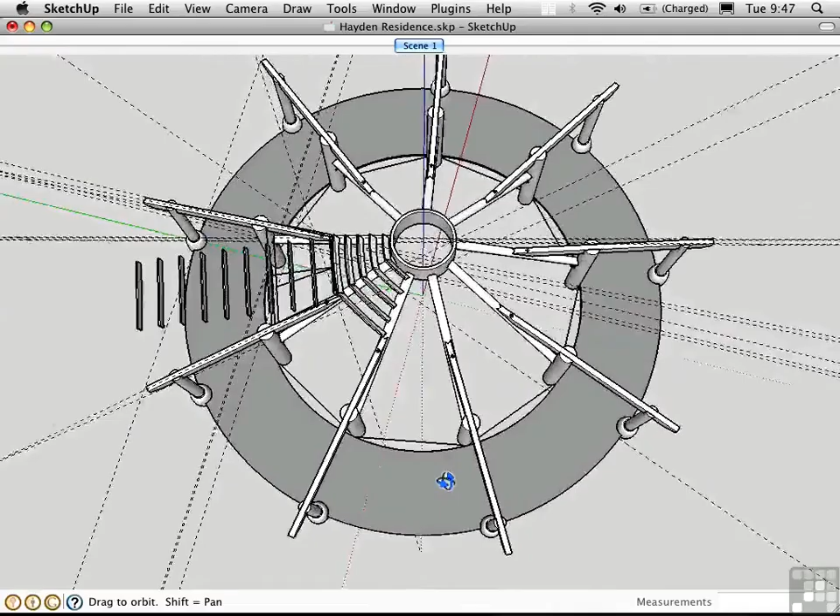Being able to change the drawing axes becomes critically important when working with more complex geometry. Here I'm working with a 9-sided structure, so I have some unusual angles to deal with. The drawing axes are represented by the red, green, and blue lines forming a tripod.

I've centered this within the design, which is good practice whenever you're dealing with a circular or regular polygonal structure—center it around the axes. Also, if you're creating a component, it's good practice to locate the drawing axes in a meaningful location, because the drawing axes within the component become that component's insertion point. We'll cover components in greater detail later on.

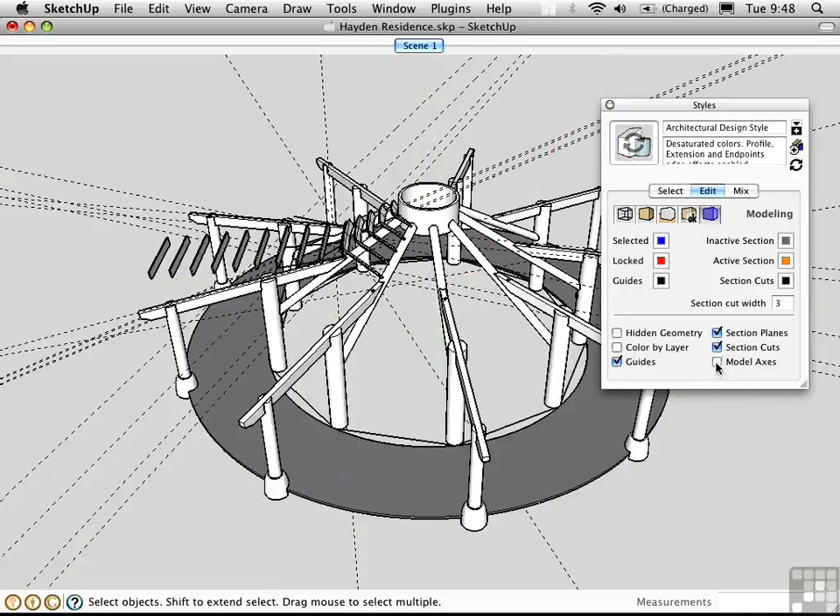You can toggle the display of the drawing axes in the Styles window. Go to the current style, choose Edit, and click the last button to go to the modeling settings. You can toggle the model axes with this checkbox—it merely displays or hides the axes. Sometimes when doing a presentation on screen, it looks cleaner to toggle the axes off. If you're using my shortcuts, you can toggle this by pressing Ctrl-A.

There are a couple of different ways to change the axes. First we'll use numbers, then I'll show you how to do it graphically. Let's say we know a specific angle we'd like to rotate the axes to—this allows us to draw geometry on an angle. Right now, if I draw a rectangle, it would align with the axes. Let's change the axes and draw another rectangle to see the difference.

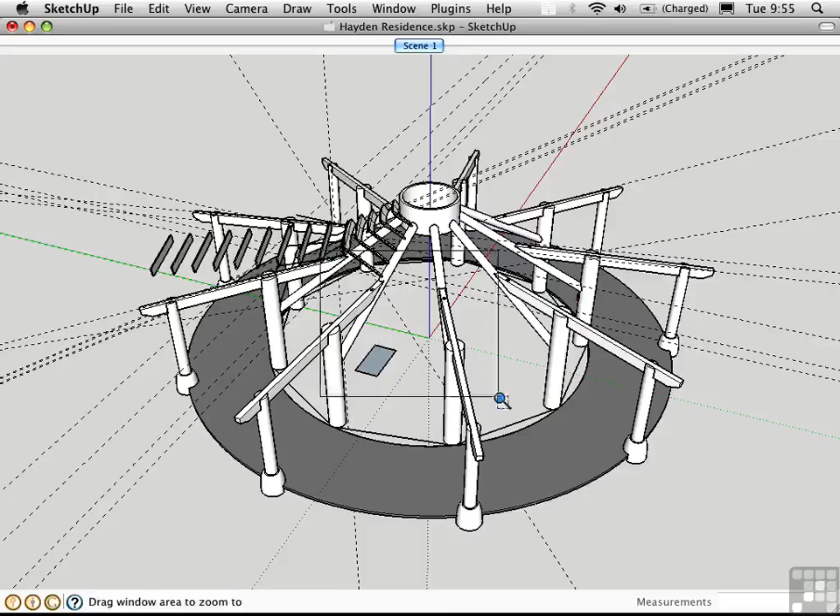I'll zoom in here and right-click on one of the axis lines. It doesn't matter which line you choose, but it's important not to click on top of something else—I'd get a different menu right-clicking here compared with right-clicking there. I'll choose Move from the context menu, which gives us a chance to set an offset distance for the axis or a rotational angle. In this case, let's rotate the drawing axes 40 degrees around the blue axis.

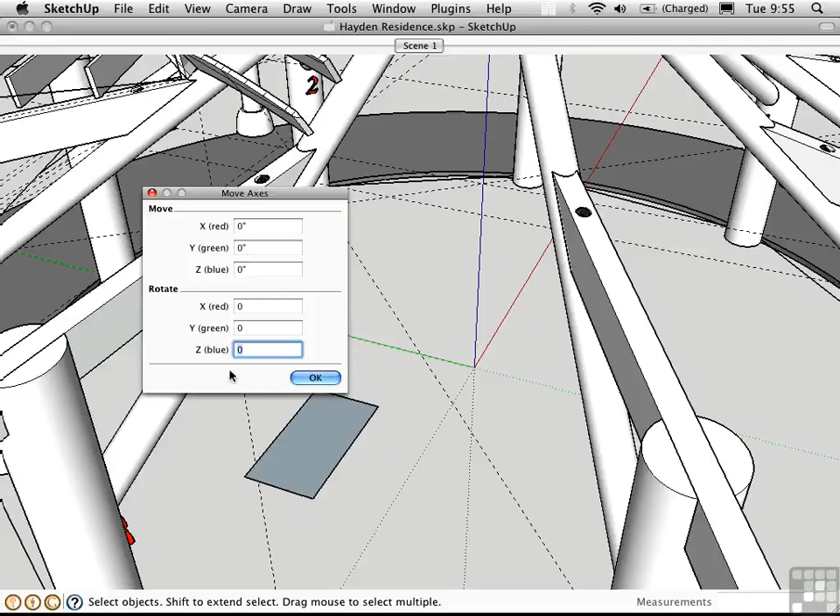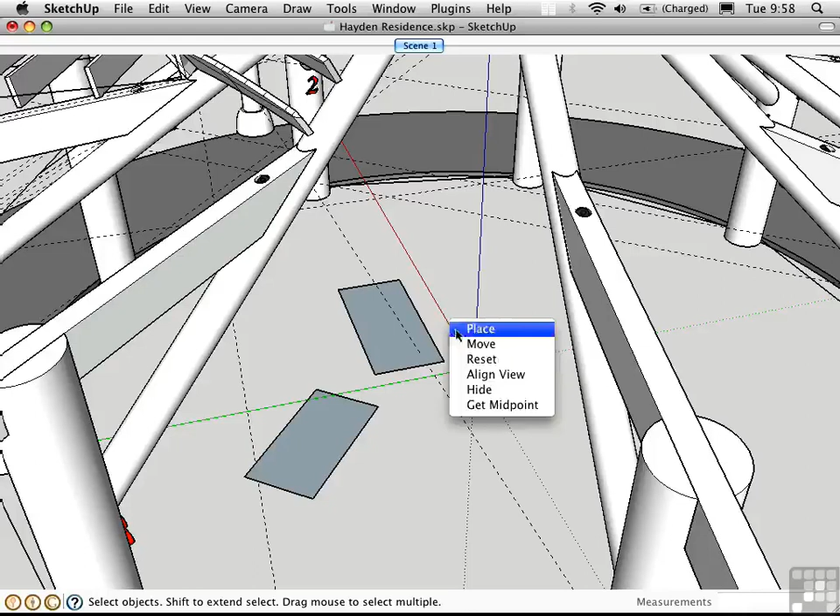Now I'll draw another rectangle, and you'll see that it aligns with the new axes. Let's say we want to go back to the original orientation of the drawing axes, but don't want to be bothered typing in numbers again. We can just right-click on a drawing axis and choose Reset from the context menu, and we'll go back to the original drawing axis. In AutoCAD, this would be called the world coordinate system.

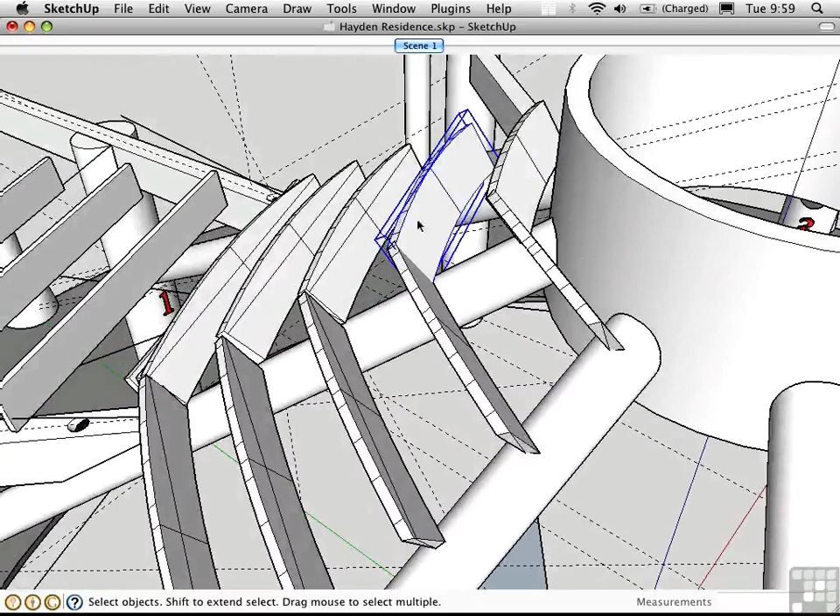Now let's take a look at the graphical approach to changing your drawing axes. I'll zoom in here on these purlins and rafters. Let's say I want to create another purlin down a bit, and I don't want to try to figure out this angle—I just want to do it graphically. I can do that fairly easily by changing the drawing axes with the Axes tool.

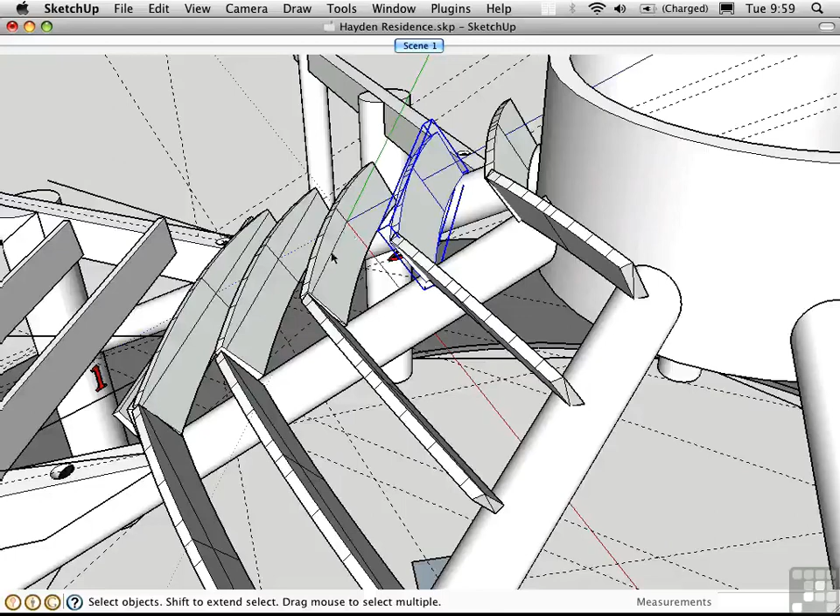If you're using my shortcuts, that's Option A to activate it. There's a drawing axis connected to the cursor—click a point to determine the new origin, then click a second point to determine the direction of the red axis, and a third point to determine the direction of the green axis. Now the tripod is located here, so I can easily slide objects along its blue axis.

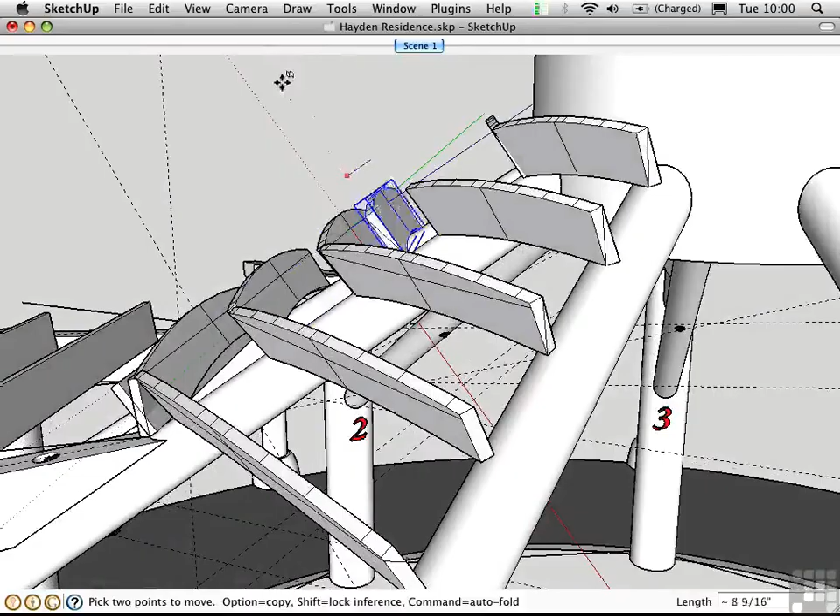I'll press the up arrow to lock the blue inference, and you can see that I can easily move this purlin up and down the rafters. Let me rotate the point of view to show you what's happening there. This is really the key to working with more complex geometry.

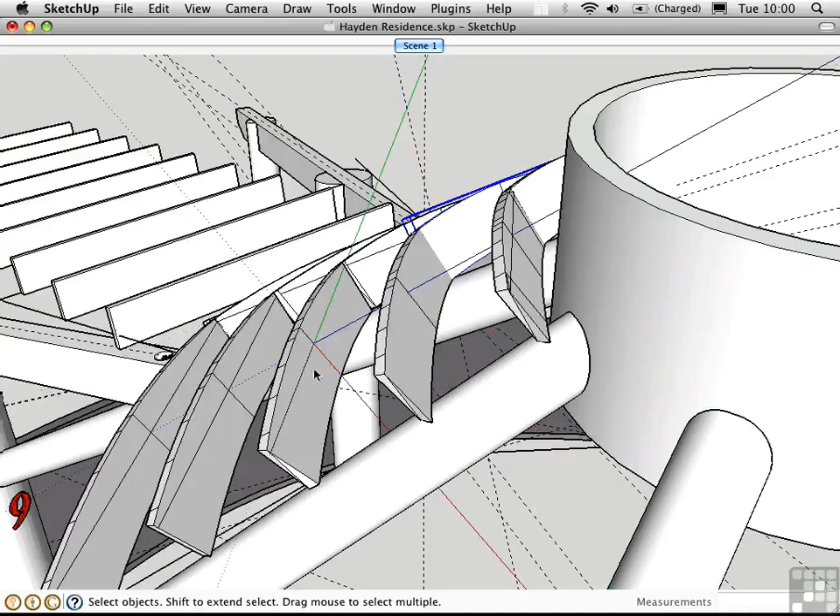If I want to work on these purlins over here, I just need to press Option A again, click here and here to create a new orientation for the axes. Then I can go ahead and either draw a new object or move an existing one in this new plane. Let me rotate somewhere here where you can see this a little better. There we go—so I'm able to create geometry in this plane parallel with these purlins.

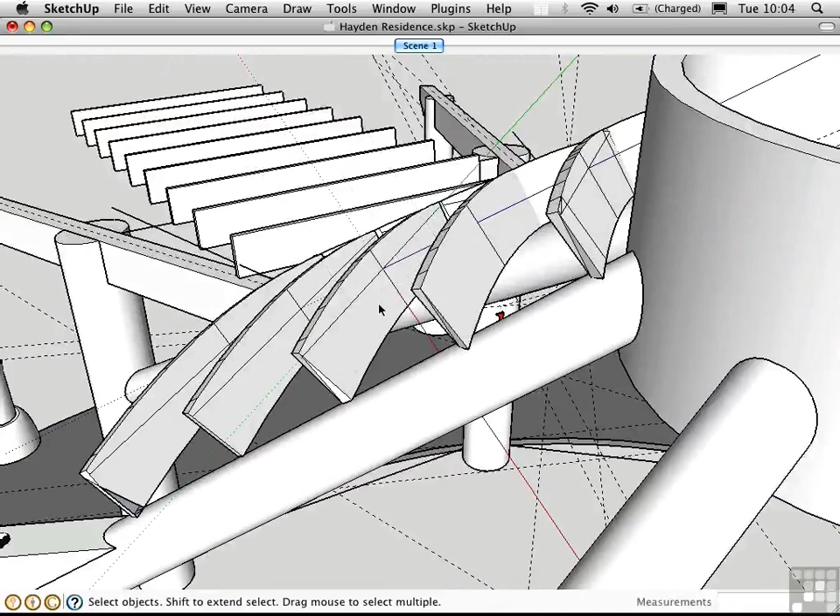One final tip is a convenience I've built into my shortcuts, and that's Reset Axes. I'll press Shift A, and it automatically goes back to the original orientation for the drawing axes—you can see that down here.

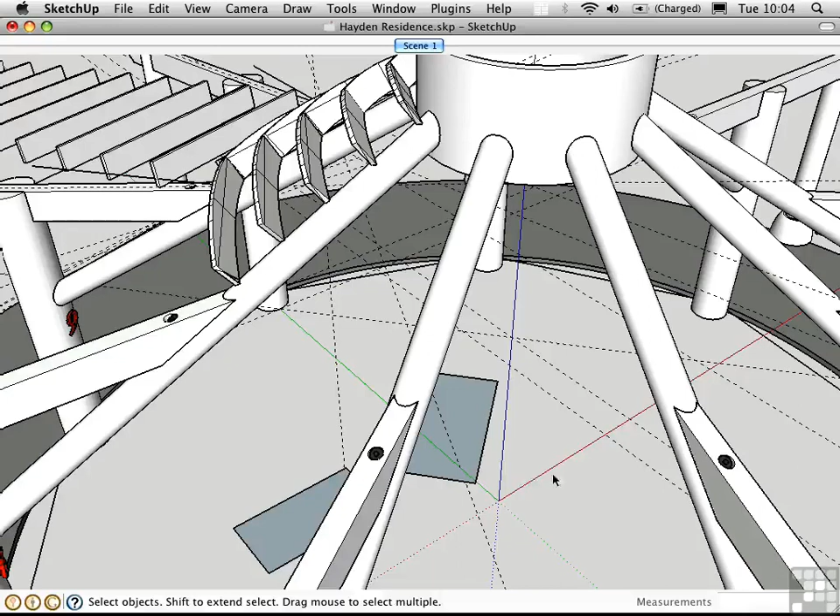So just to recap: we have Option A, which allows you to set the drawing axes. We have Control A, which toggles the display of the axes wherever they are. And we have Shift A, which resets the drawing axes. If you want to change the axes numerically, you have to right-click on an axis and choose Move to access that dialog.